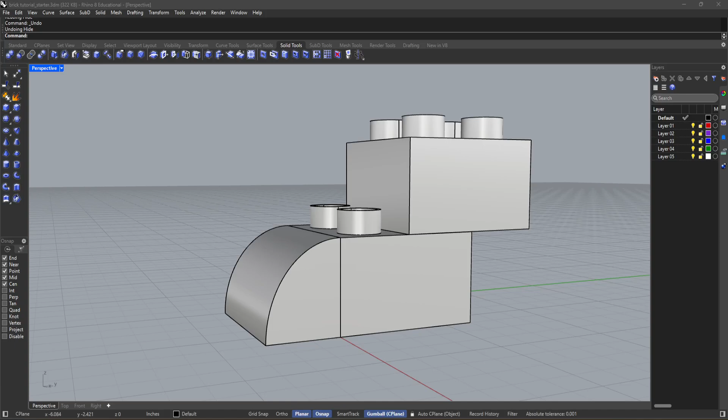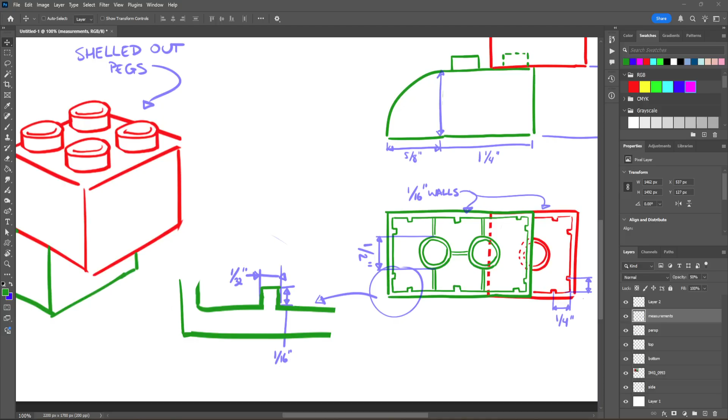Okay, so I now have two bricks which are pretty accurately modeled to what they look like, at least from the top. I've got my little square brick, and then I've got my brick with the curve on it, and that is looking pretty close to what we have here, right? But that's only from the top view.

What about from the bottom, right? Our bricks are not solid objects. They are hollowed out, and that's how they snap together. So we are going to want to hollow out our bricks as well. They are not built the same. There are certain elements that are the same, but they do have some key differences. So let's talk about those similarities and differences.

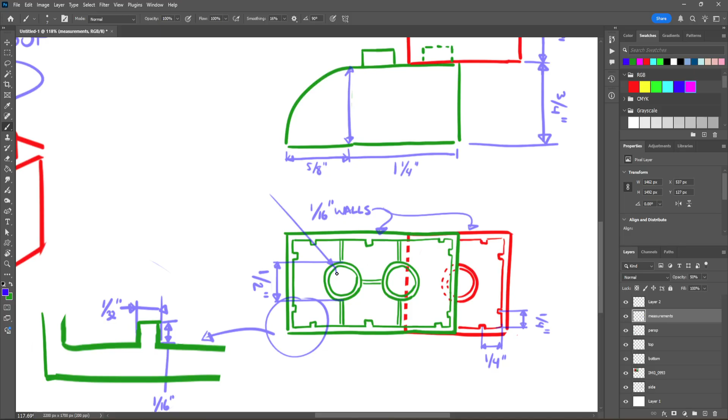They each have 1/16 of an inch walls around the entire perimeter, and they each also have a circle, like a little circular peg, on the inside that is about half an inch in diameter from outer edge to outer edge. The inner edge is offset again by about 1/16 of an inch. I'll go ahead and write that in here so we can see it. So that's the thickness of this wall right here, and both of these bricks have that.

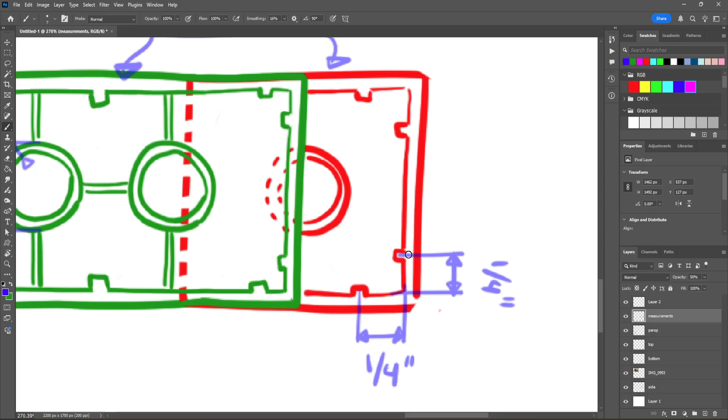And they also both have these little pegs around the outer perimeter. These pegs are offset from the interior wall. I'll zoom in on this a little bit. They're offset from the interior wall to the center of the peg about 1/4 of an inch, and they're squared, so it's the same on either side. And if we zoom in even closer, they're about 1/16 of an inch tall and about 1/32 of an inch wide.

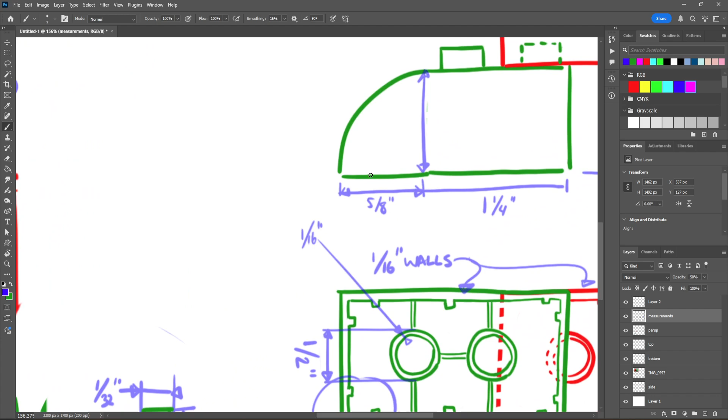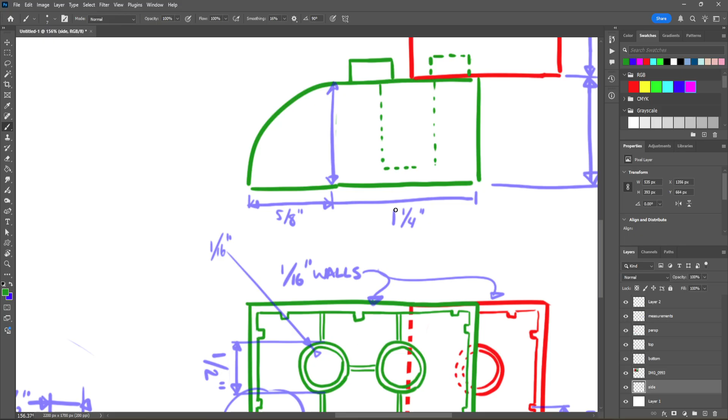Now the pegs come all the way down to the bottom surface of our bricks, but our cylinders - and this is kind of important - our little cylinders in here, they only come down to about here in the bricks. It's hard to tell just using our rulers, but I think they're offset, they kind of fit snugly with the pegs. It looks like it's offset about 1/16 of an inch, so I'll add in that measurement as well. The pegs are offset from here to here, that's about 1/16 as well. But these little interior pegs, they are flush.

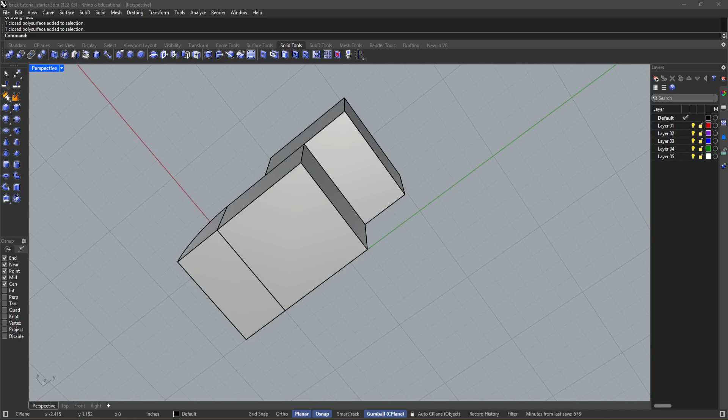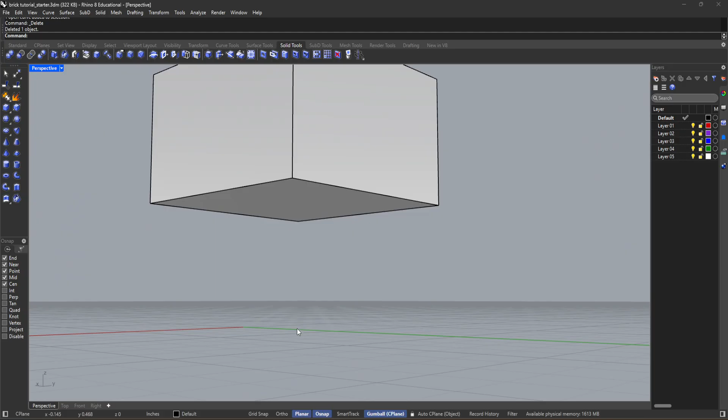So I want to hollow out my bricks, and I'm going to do them one at a time because they are different from one another, built a little bit differently. So I'm going to select my curved brick, use my scroll wheel, and go ahead and hide the object. I can go ahead and delete this curve as well, I don't really need it anymore. What I'm left with is my brick. I'll notice it's now not snapped to my origin, which is right here where this green and red line meet, but it is in its correct place relative to where that curved brick is. So we're just going to leave it and model from here, and we should be fine. We shouldn't need to snap it to the origin at any point.

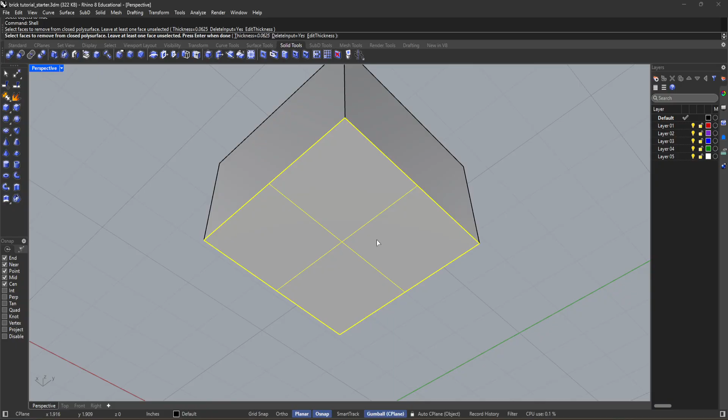Okay, let's hollow this guy out. So what I'm going to do is type in my shell command, and I'll pick the faces that I want to remove. In this case, this bottom face, because it's hollowed out from that direction. I want to make sure that my thickness is set to 1/16 of an inch. I'll hit enter, and then once I confirm that, enter again. And it's looking pretty good.

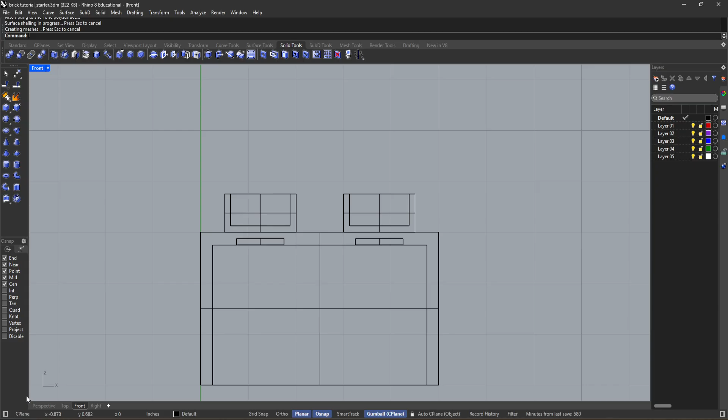But I do have these 4 little divots in the roof, the interior roof of my brick. So let's see what's going on here. When you're trying to analyze your drawings, I find that using your orthographic views is really helpful. So from our front view, I can see that, okay, what happened was - you remember when we built these cylinders on top and they were built as separate objects and then we combined them with our total brick? So we built them, and we can see this from the front view.

We used a shell command to make these each 1/32 of an inch thick, like the walls. And the bottom of the cylinder came down to the top of our brick. So when we told it we wanted a 1/32 of an inch border around the whole thing, that included the bottom.

So this distance right here is 1/32 of an inch from this line to this line. And then when I hollowed out the total brick, it said, okay, you wanted this to be 1/16 of an inch, we'll keep that border the same width. So that's what's happening here.

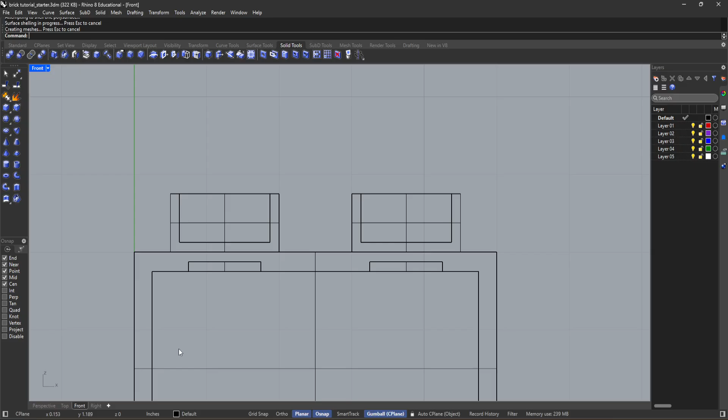It kind of juts up into the ceiling there. So it did exactly what I told it to do, but I made a mistake earlier, and that's why it doesn't look the way I want it to. Here's what we can do to fix it. I'll hit Control Z to undo that shell operation, so this is back to being a solid object.

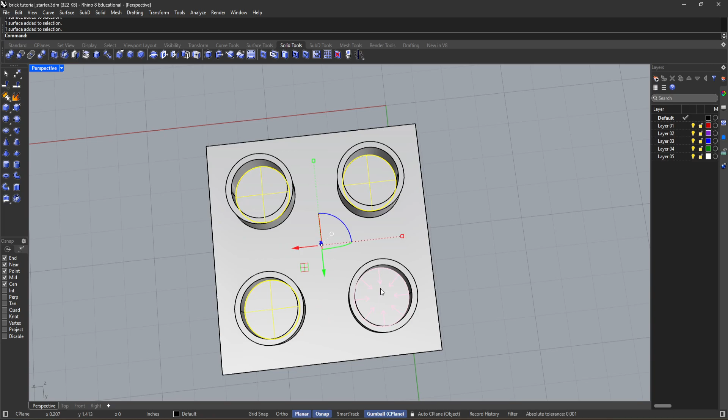And then I'm going to hit Control Shift, and then I'll click on each of these surfaces, these little interior cylindrical surfaces. I can do this in my front view if that feels easier. I'm just going to click on my blue arrow, the one aligned with my Z axis. I'll click on it, not click and drag, just click.

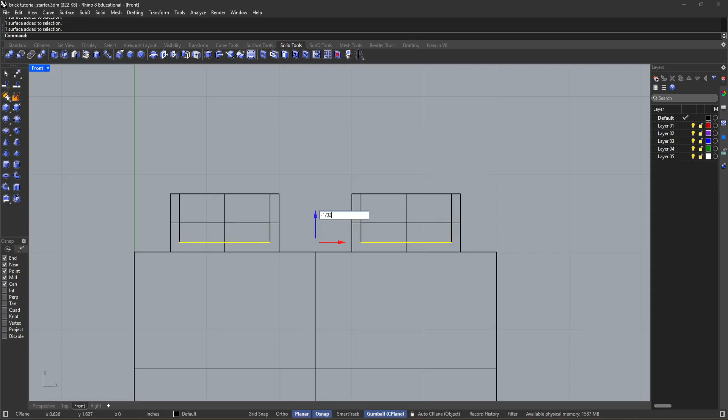I'll type in negative 1/32 of an inch. That means I want it to go downward, negative, and I want it to only move down 1/32 of an inch because I'm getting rid of that additional border I made. I'll hit enter, and now these surfaces should be flush with these surfaces, only separated by these little borders.

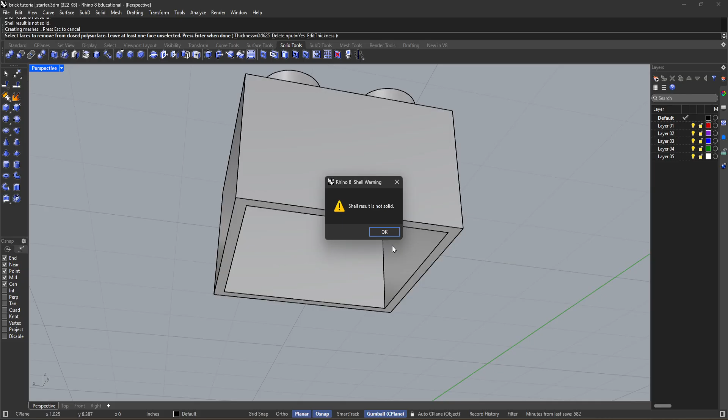Great. Okay, so let's see what happens if we shell again. Okay, so shell result is not solid. So this is basically going to be a great way for us to demonstrate how do you kind of build around an issue that arises in Rhino.

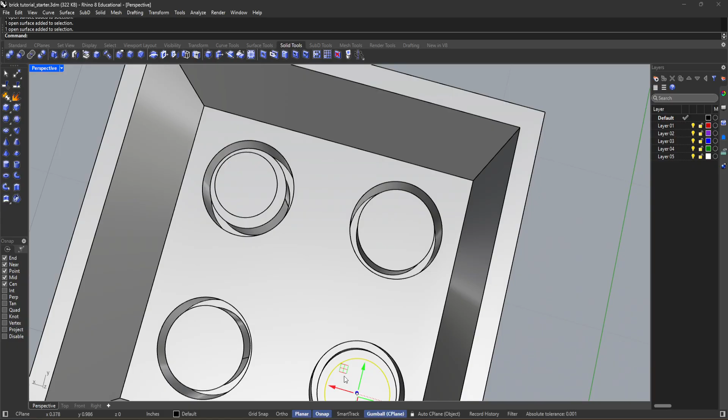Rhino is, sometimes it's frustrating. It'll like break for no reason, or you'll get a result like that, and you're not really sure what's going on. It looks like these pegs on these two corners are slightly different than these two, and I'm not certain why.

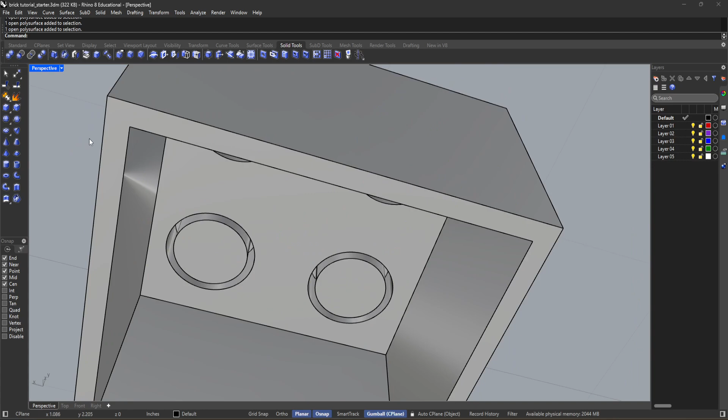Let's see what happens if I just delete those two surfaces. Okay. So it says, when I click on my object, you'll see it says one open poly surface added to selection. That means that it's not a closed shape, it needs to basically be watertight.

And it looks like I am missing an interior. See, when I'm rotating my camera, I can kind of see that I'm missing this interior surface right here, the one that would be like the interior roof of my object. There's a little gap in there.

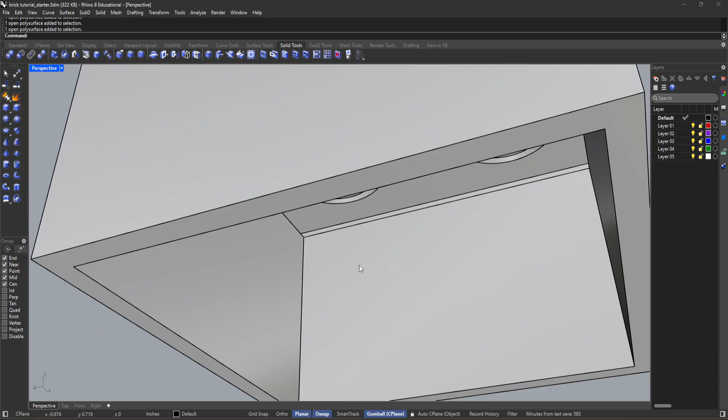So what I'm going to do is build a surface, not a solid, but just a surface. Come over here to my surface tools, and I'm just going to hit rectangular plane. I can also type that in, of course.

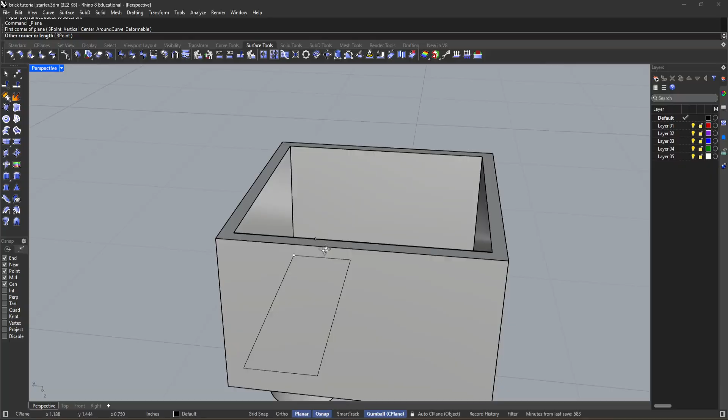And because my snaps are on, I can make sure that I'm going to snap to the end of this interior box. And then I'm going to adjust my camera so I can see the opposite corner, and I'll snap it to that end of the interior box. So this should be pretty squared.

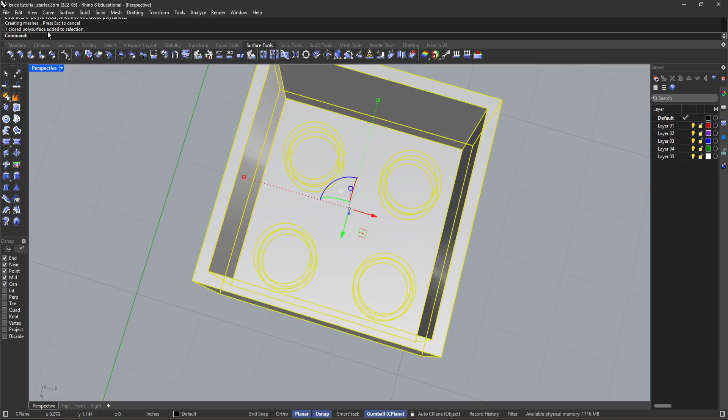And now I've got this plane. It's still an open surface because it's not connected to this other open surface. So if I grab both and I hit join, and then I click on the object again, great, now it says it's closed. That means I did it correctly, I fixed it all up.

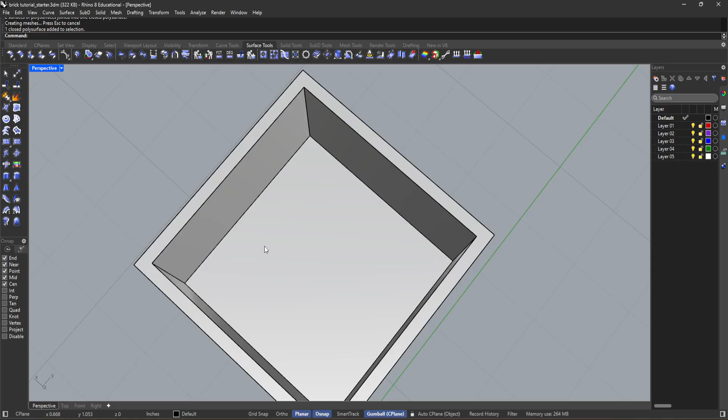And now if I go to, for example, my front view and see that wireframe, the pegs are flush to the bottom. I have this little interior roof in here. Great, so I have now shelled out my object. And by the way, like I said, things break in Rhino all the time. Not a big deal. Sometimes it's very frustrating, but usually the fixes are pretty easy, or at least you can go backwards and figure out where you went wrong and still achieve the result you're going for.

Okay, so I think next what we should do, let's take a look at this. Let's next drop in our circle, our interior circle. It'll be the same as these green ones, so it'll be 1/2 inch in diameter from the outer edge, and then it will be 1/16 of an inch thickness, and there'll be 1/16 of an inch between the bottom of the cylinder and the bottom of the brick, right?

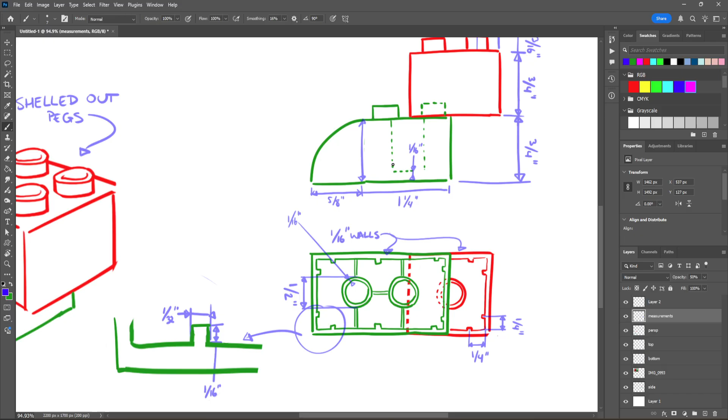On the interior, it'll be raised ever so slightly. So what I'm going to do is build this cylinder first. I'm going to have it stretch all the way down to the bottom of my red brick, and then I'll just move that bottom surface up 1/16 of an inch.

And then I can hollow it out. All right, I'm going to type in cylinder. I want to build another cylinder. I want the base of my cylinder to be in the center of my big brick, right?

You'll notice that if you try to hover your cursor over something to get it to the center, it won't snap to it automatically. What you have to do is hover your cursor over the perimeter of the object you want it centered on, and a little white line will show up saying you want to be in the center of this object. Once I get that, I can click, and it defaults my circle to the center.

I'll make sure I'm looking at diameter, not radius, and set my diameter—let me double check—yeah, it's 1/2 of an inch. I'll click, and then it asks where I want the end of my cylinder to be. I'll switch to my front view and snap it down to the bottom.

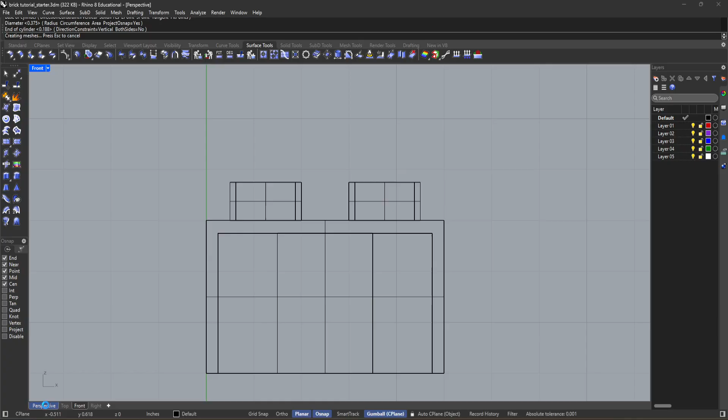Now, if I look at it in perspective, I've got that cylinder in there. It looks pretty good. It's a separate object from my brick—I haven't combined them yet.

I'm going to first raise this bottom up 1/16 of an inch, and then I'll shell it out. So I'll hit Control Z again—whoops, I didn't want to do that. I'm sorry, not Control Z, I mean Control Shift.

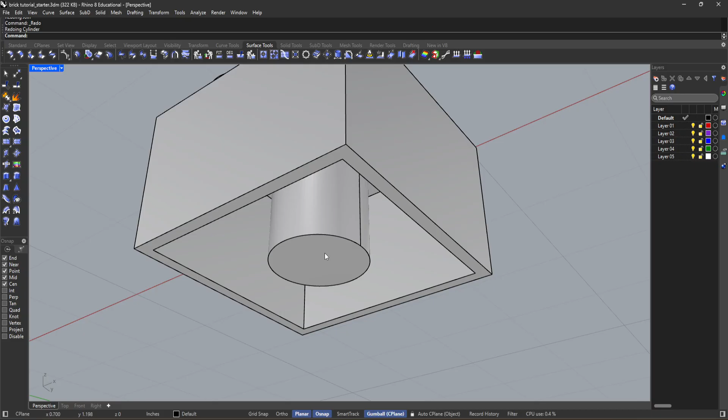I'll just click on this bottom surface, since I'm only adjusting that surface, then click my up arrow and move it up positively 1/16, since I'm moving upward. Enter, it moves up. Now if I look at this from one of my orthographic views, that interior peg has moved up just a little bit.

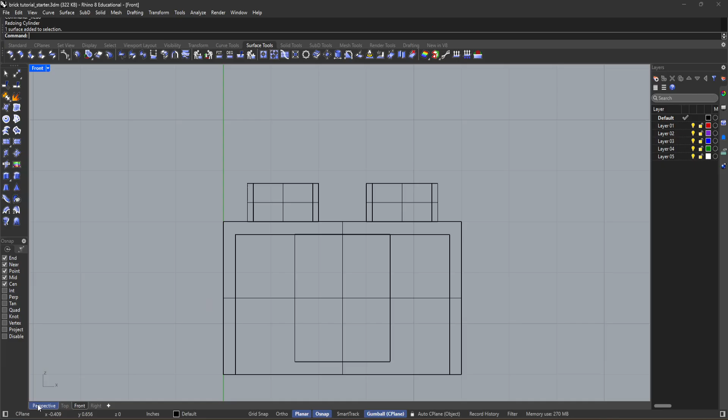Great. Now I want to hollow out this cylinder, and I don't want to make the same mistake I did with those pegs on top. I'm going to come back over to my solid tools. I want to make sure it's hollow from both ends, so how am I going to see that interior surface?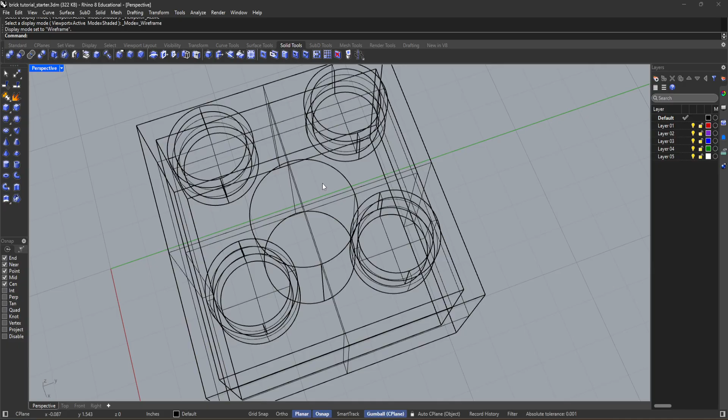If I go to my wireframe view, it gets really confusing, and I can't actually click on this interior surface—I can click on the edges or the cylinder itself, but not surfaces, because my wireframes don't care about that. So instead I'm going to hide this top brick so I'm just looking at the cylinder, and now I'm going to shell it out.

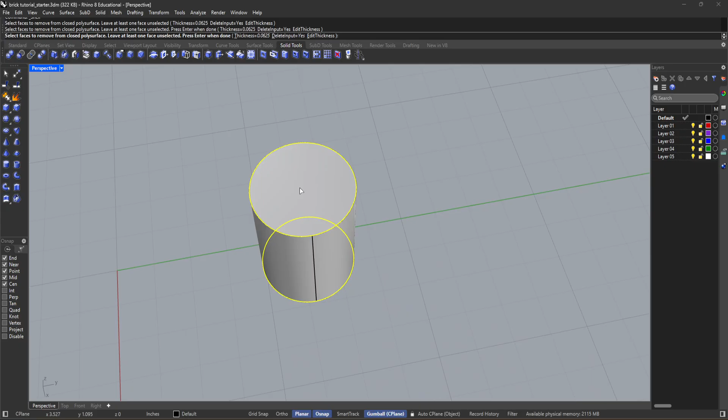I'll shell this out from the top and from the bottom—I hit both sides because I want it to be hollow. My thickness should still be 1/16 of an inch, and I'll delete that input. When I'm good to go, I hit enter.

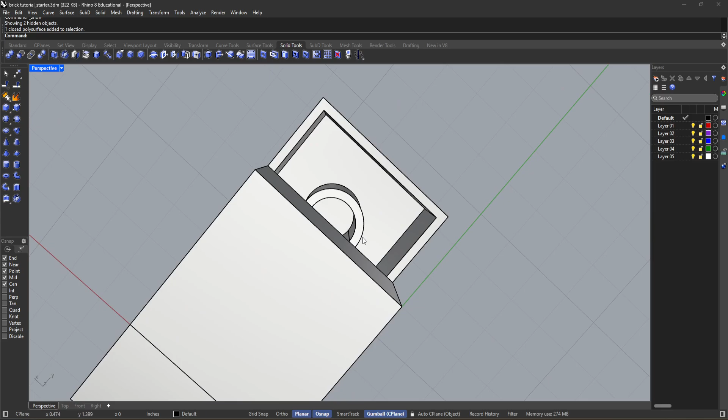And it's shelled out. Now if I show the brick, it'll make this reappear too—that's fine, we can go ahead and rehide it. But if I look at this from the bottom, it already looks way more like how my Duplo blocks look when I hold them from the bottom—I can see that half circle happening in there. Amazing. I'll hide this block with the curve.

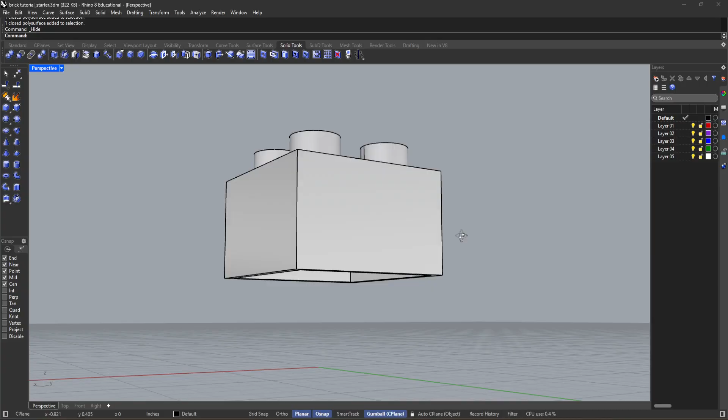Okay, so I'm almost done with this red brick, actually. All I really need to do now is add those additional little pegs, these little squares in here, and that should be pretty easy to do.

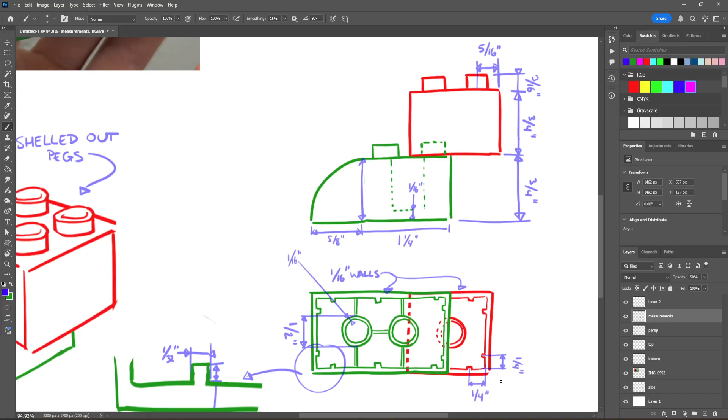Let's look at our object from the top view so we can see everything accurately, like what it looks like in my sketch. I have my 1/16 of an inch walls, and I have my interior peg. Now I'm going to combine these two objects.

I'll go back into my perspective view. I'm going to combine my cylinder, hold down shift, click on my box, and Boolean union these two. Click Boolean union, click on it. It's all one object now. They're combined.

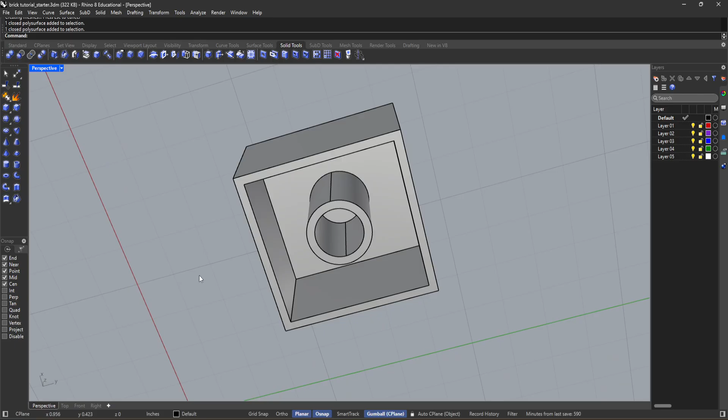Now I'm going to build out my little peg guys. Let's draw a guiding box from the interior corner of my brick, 1/4 of an inch inward. That will mark the center points for each of these little rectangles.

I'm going to draw a rectangle. It'll ask for the first corner, so I'll snap it here. Now it asks for the length, and we'll go with 0.25, enter. Then it asks for the width, also 0.25, enter. Great, so now I have this curve.

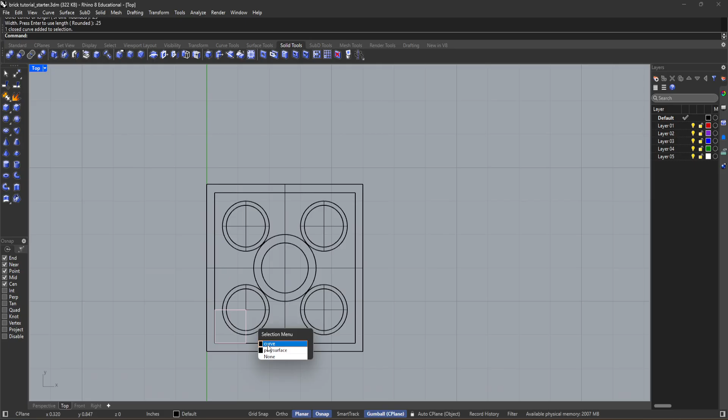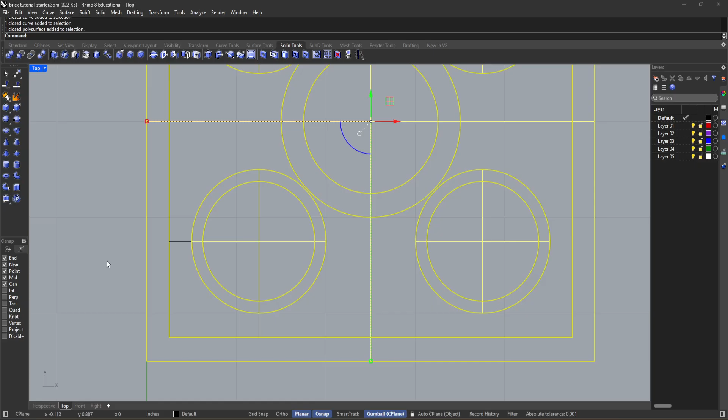I want the center of my little brick guys to be right along this axis, and it conveniently lines up with the axes of these little pegs. Basically what's happening is when you snap one brick into another, this interior circle of the peg—I'll use a different color—fits tidily, held between these notches and the center peg. That's why everything should line up tidily, but it's nice to measure it out and confirm, like this 1/4 inch, so I can see that.

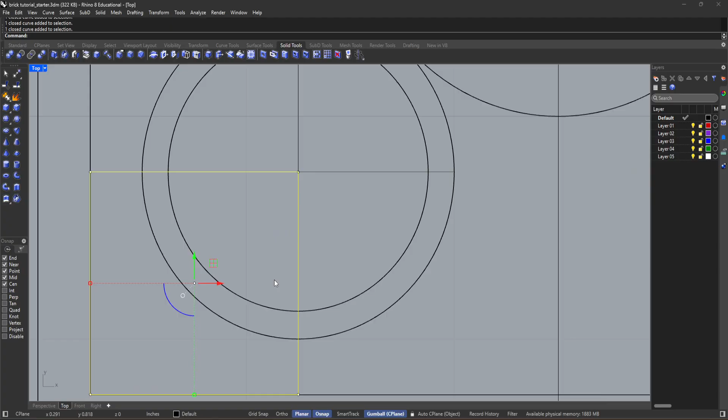I'm going to go into my perspective view just to see where it's coming from. I've drawn this rectangle on the interior ceiling of my brick, and now we can use it as a guiding point to place our little rectangular pegs.

So I'm going to come over to my box again. I want to draw my box from the center of this line. Before, we drew boxes starting with one corner and ending with another, but I hit escape to get out of that command. Instead, I want to draw the center of the box and then extrude it out from there. So I'll type in box, and then hit center.

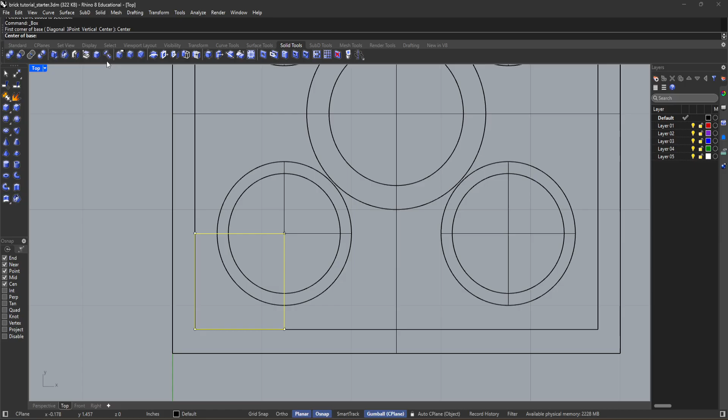It wants to know the center of the base. I'll hover my cursor over here—it should snap to either the center or the endpoint, they should be the same. Click.

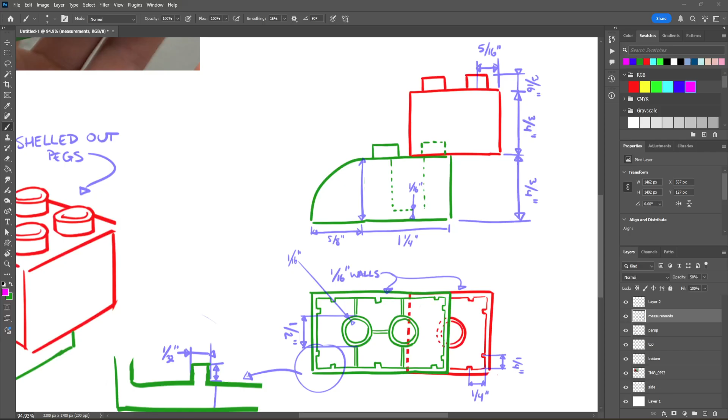Now it asks for my dimensions. I want to make my total width 1/32 of an inch and my total height 1/16 of an inch. So, width 1/32 for that first measurement, enter, and then 1/16.

Actually, because we're drawing from the middle here, and we want the length to be twice this, we're actually going to make our width, instead of 1/16, 1/8—because half of our little rectangle gets dropped into the border and disappears.

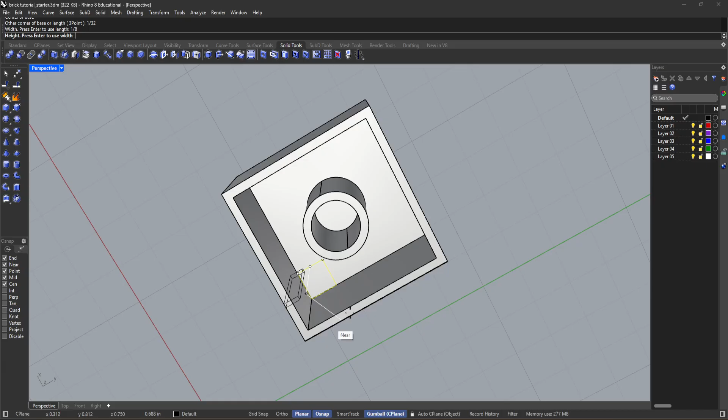Now it wants to know how tall I want this thing. I'm going to switch my views to the right view and snap it downward to the apparent intersection. Now if I look at this in perspective, you can see how the shapes overlap with each other—they look flush, but you can still see the outline.

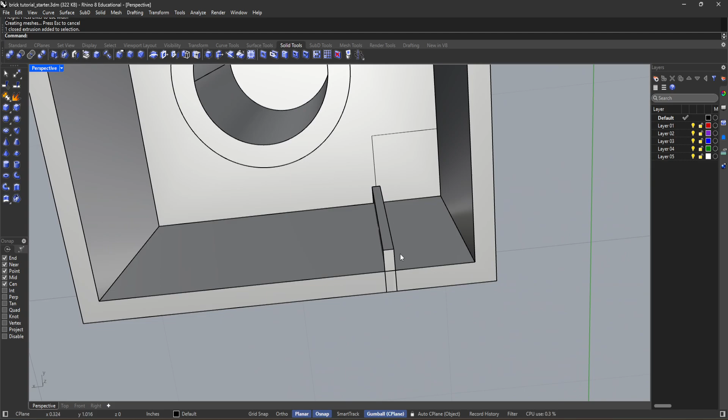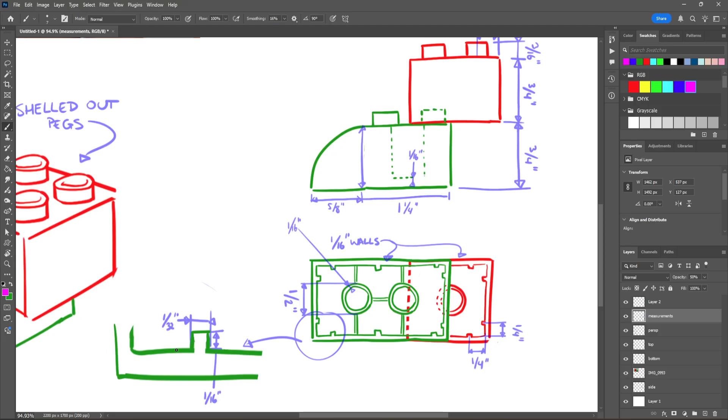So just to reiterate, because I was drawing from the center and it wanted to know how tall to make this rectangle, I did twice what this height was. So instead of 1/16, I did 1/8, so that it would go 1/16 in one direction and then 1/16 in the other.

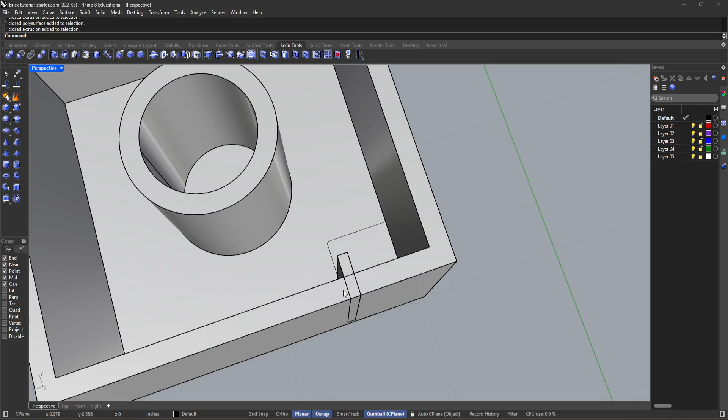Now let's say I want to trim off this excess here, maybe I don't want this intersecting, or I want this peg to end right there, I don't want those extra lines. It'll be okay if you don't do that—you can Boolean union them, and because they're flush, they'll intersect and look nice.

But just to demonstrate how that would work, you can use a command called trim, T-R-I-M. It'll say select your cutting objects, so I'm going to select this brick because I'm keeping the whole brick, and that's going to intersect with my other object. Then I'll hit enter, and it says select object to trim, so I'm going to select this guy in here.

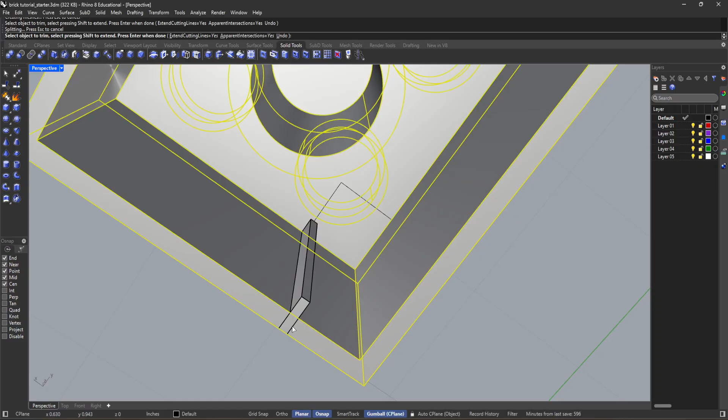You might need to make a couple of selections, but you want to click the object. I'm going to Control Z this a couple times. You want to click on the object on the side that you want to trim it. So if I wanted to trim off this part and leave this rectangle, and I clicked here, that part would disappear, which I don't want. So I need to make sure I'm clicking on the side I want to trim.

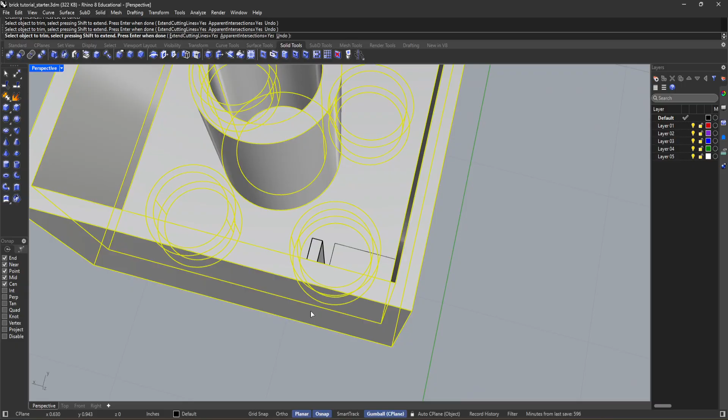Okay, it looks all right, I'll hit enter. You'll notice that it opens up my poly surface here, like now it's basically fully cut off that edge. So I'm going to go ahead and cap that really quickly, and now it is closed. Great, okay.

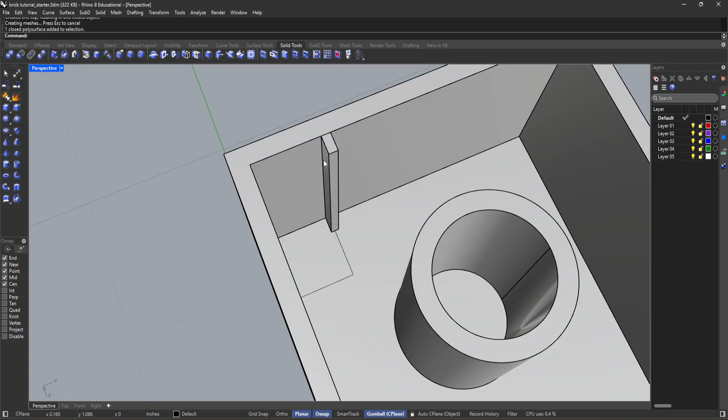So if I look at this from the top view, I've got one peg, and I want to make a bunch of them, right? I should have 1, 2, 3, 4, 5, 6, 7, 8. I'm going to do the same thing that I did with my pegs on the top, and I'm just going to mirror it, basically. So I'll select it.

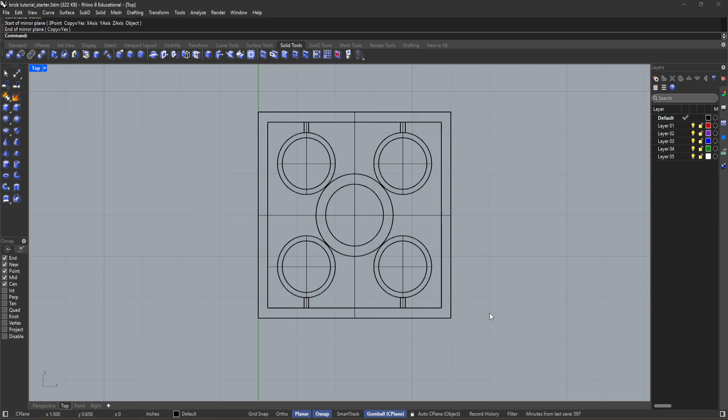I'll type mirror. Start of my mirror plane is the middle here. I hold down Shift to lock it to my axis, click—all right, that's done. Enter to do it again. Or I'll select them both, grab both objects, and now I'll mirror them this way this time. Cool, okay, so now I have 1, 2, 3, 4 of these pegs, right? And they look all right.

I want to put them—instead of mirroring them, I want to copy them and rotate so that they fit in with this other side, so that they go this way, horizontally instead of vertically. So how do I do that?

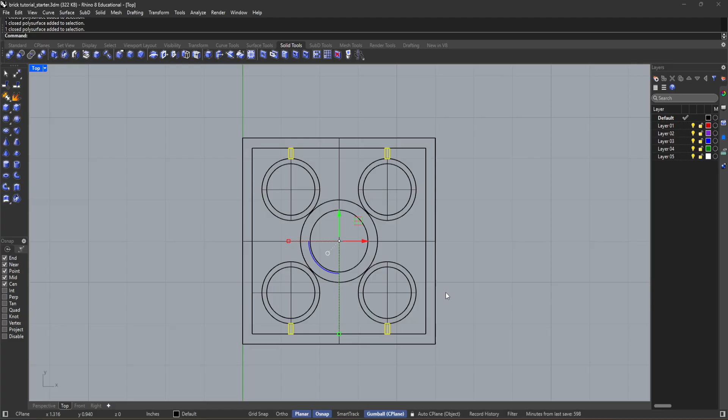Do you remember how we copied our brick from our original square brick so that we could edit it and make our rounded one? I'm going to select each of these little pegs—I held down Shift, clicked on each of them. I'm going to copy, I'll paste. If you just copy and paste without typing those commands in, it'll paste directly into the same place that you copied it from.

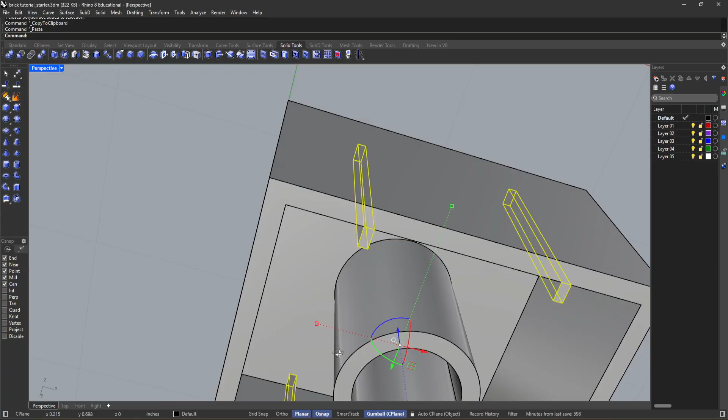Staying in my top-down view, you'll notice your gumball sometimes has these little curves along it. If I go into my perspective view, I can see more of them—that's my rotation option, so it'll rotate purely along that axis. If I go to my top view and click and drag, it shows me by how much I've rotated it. I can spin, spin, spin. If I hold down Shift, it'll lock me to those dimensions, so I can rotate it 90 degrees, like that.

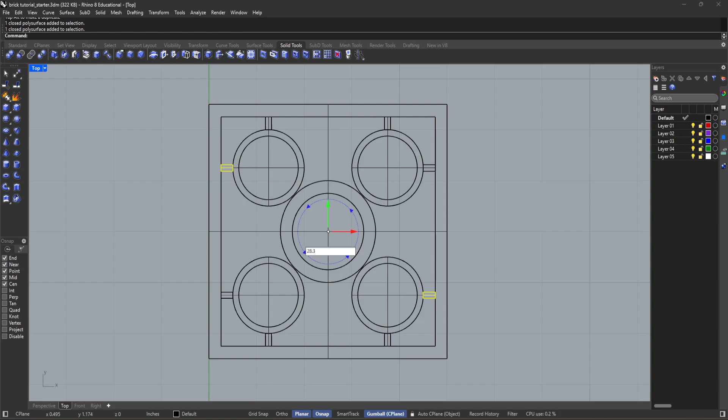Just for demonstration's sake, let's say I wanted to rotate these a very specific amount—same thing as when you click on the arrows. If you click on the rotation, you can type in a specific number, like let's say I want to rotate it 28.3 degrees for some reason. I can rotate it exactly that amount.

Okay, let's go back to our perspective view. This is looking great, this is just about done. I'll delete this curve, this little box that I drew to guide my pegs in, and now I'm just going to select everything.

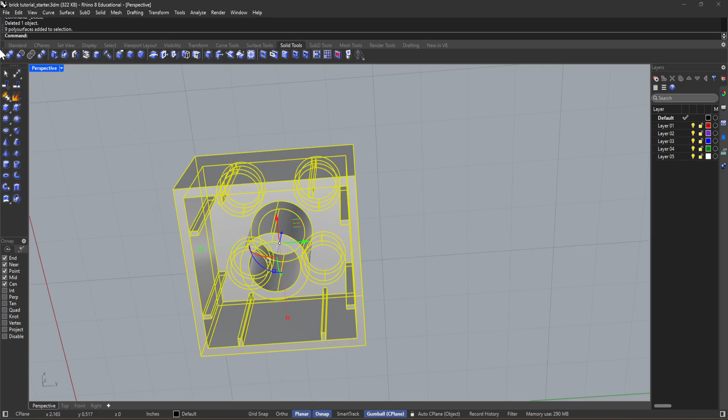So I'll do that backwards selection style. I've got everything, and I'll Boolean union it. Now I can check to see if I did it correctly—I'll rotate the brick, take a gander at it, and click on it. It says that it is a closed polysurface, which means I did that right. Fantastic, so this brick is done.